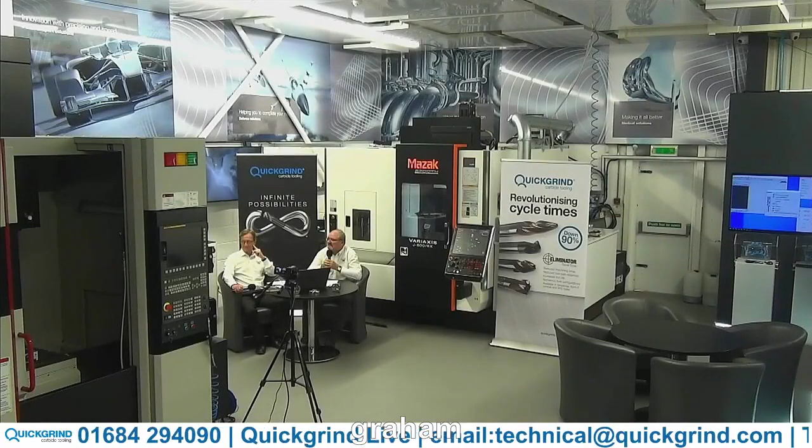Well, thank you, Ross. As Ross has said, this is the live event at the Technical Centre at Tewkesbury, part of the Quickgrind factory. We hope you enjoy the event. My name is Mike Stobart. I'm the Technical Support Manager for the UK.

After I've done my little bit about Quickgrind and where we are, I'll be handing over to my colleague Graham Hawke, who will introduce infinite possibilities, as you can see plastered behind us. It's a very important part of our company and what we can offer.

So Quickgrind has been a 50-plus year company. We specialise in producing solid carbide cutters for particular applications. Within the last 2 years or more, we've spent over £2 million investment in new machinery.

So we have the latest ANCA software, ANCA grinding machines with laser checking, to the extent that now we say in a batch of 50 to 100 tools, we're producing within 1 or 2 microns tolerance, which is, I think, will be very good. Something very important that we'd like to get over today is that seeing is believing.

We're very proud of this factory. It's grown up over the last 7-8 years. It's how it's changed, and we invite people to come and see us.

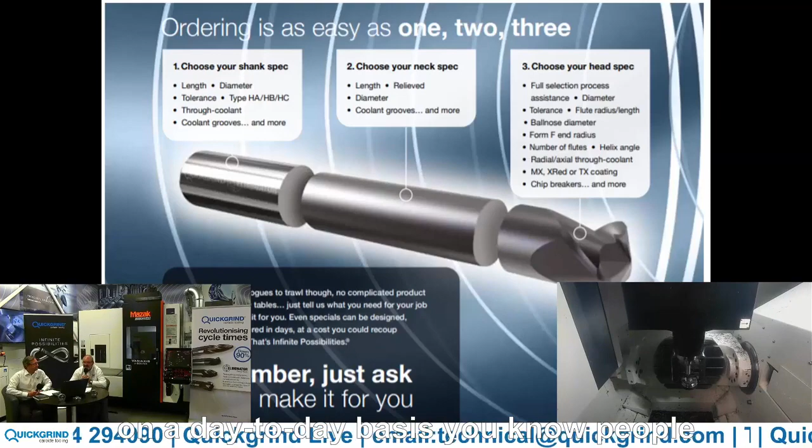All too often, on a day-to-day basis, people talk to me and they buy out of a catalogue, so they're just compromising instead of using a cutter and customising. What we like to look at is putting the right cutter for the right application with the right geometry and get it right first time.

So in effect, you could customise a whole component. The advantage of that is you optimise the component to its nth degree, and you're producing the part faster, you're producing it more accurately, and you're ending up with a better solution all round.

What we do is, again, we have a little slogan between us when we're out there on the road, and we say, why compromise when you can customise? And we like to go along with that.

We build a relationship with the customer or client, and we take it along as far as that as we can go, and that gives us the harmony with the customer, and we can also produce the right cutter, as I was saying earlier on.

But we'll talk more about infinite possibilities as we go on, because it will get laced in throughout the whole of this event. So we're now going to go over to a SolidCAM demonstration on iMachining, and you'll hear the voice of Ben Miller from SolidCAM explaining what iMachining is all about.

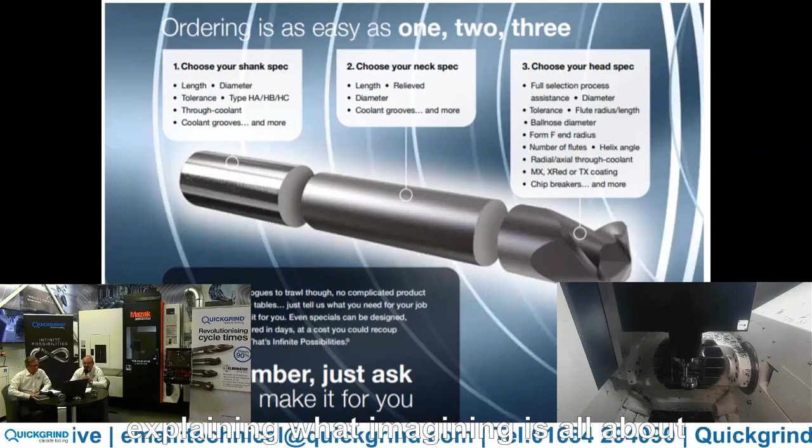So we're first going to have a look at a presentation of SolidCam. We're going to have a look at the features and benefits of SolidCam, and we're also going to have a demonstration inside the software of the part that's been programmed for today's seminar, how it's been programmed, and then we will cut back to the cameras in the machine to have a look at this being cut live.

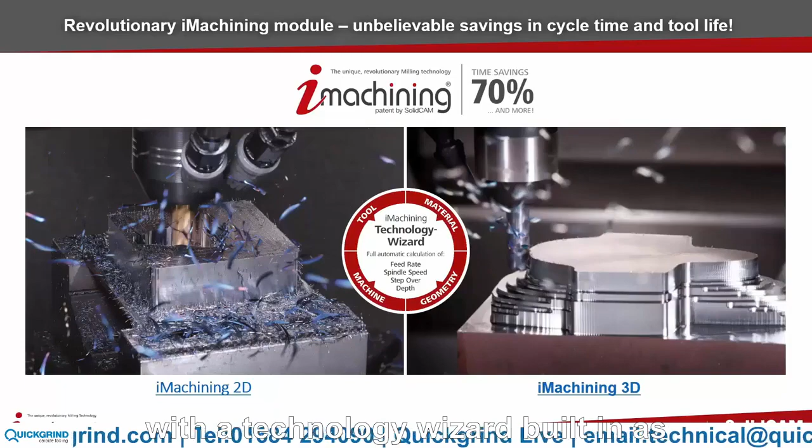Our iMachining module is our high-speed roughing operation inside SolidCam with a technology wizard built in. We get increased productivity due to shorter cycle times, up to 70% and more cycle time saving.

We dramatically increase the tool life and unmatched hard material machining. We see outstanding performance when using small tools, and we can use iMachining on 4-axis machines, 5-axis machines, and mill turn machines as well. High programming productivity and a very short learning curve.

The unique wizard will optimize the feeds and speeds for you, including the depth of cut based on the stock and the tool material, as well as the machine specifications. So this takes the headache out of programming these high-speed roughing operations.

So iMachining comes in 2 stages, all built into the same operation. The first stage is to create an intelligent toolpath, an efficient tangential toolpath which will ensure constant tool load on the machine. And then the second part of iMachining is the technology wizard.

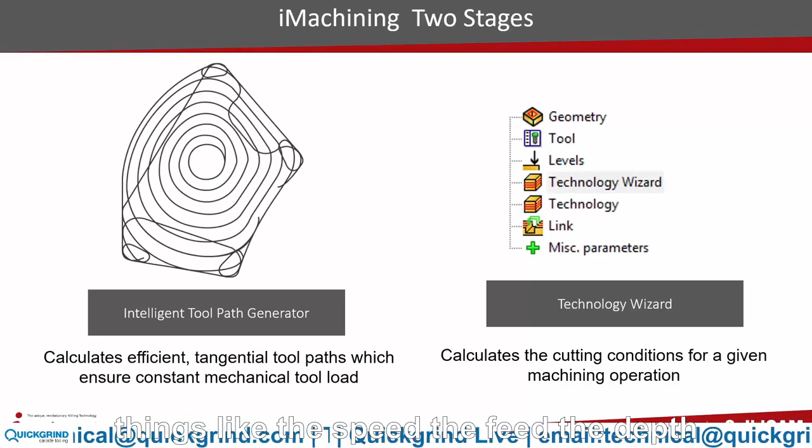This will calculate the cutting conditions for any given machining operation, things like the speed, the feed, the depth of cut, and also the cutting angles. So we can have variable cutting angles.

You can see there from 80 degrees to 10 degrees we can set the maximum and minimum cutting angles based on what we wish to achieve, or we can let the wizard handle those maximum and minimum based on the material parameters that it's been given.

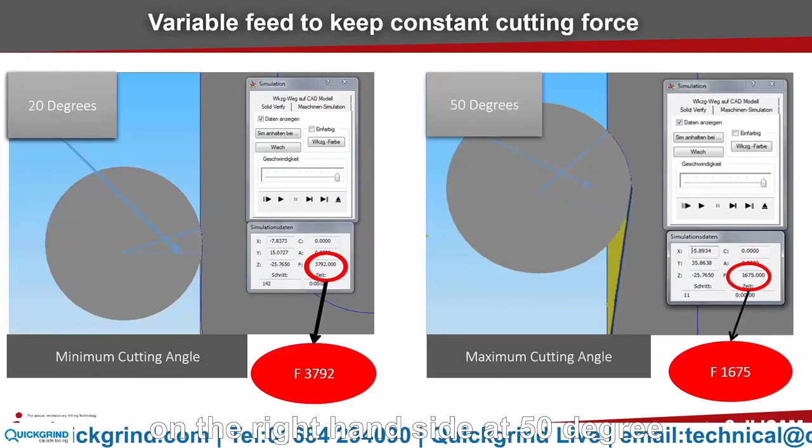You can see there on the left hand side at 20 degree engagement the feed rate is a lot higher than it is on the right hand side at 50 degree engagement. So iMachining will fluctuate the feed rate based on its engagement and its contact points as well.

iMachining is a patented technology. No other system can use our technology. You may see other systems using the spiral or morphing toolpaths, but you won't see any system using a spiral toolpath and also calculating the speeds and feeds and depths of cut using our technology.

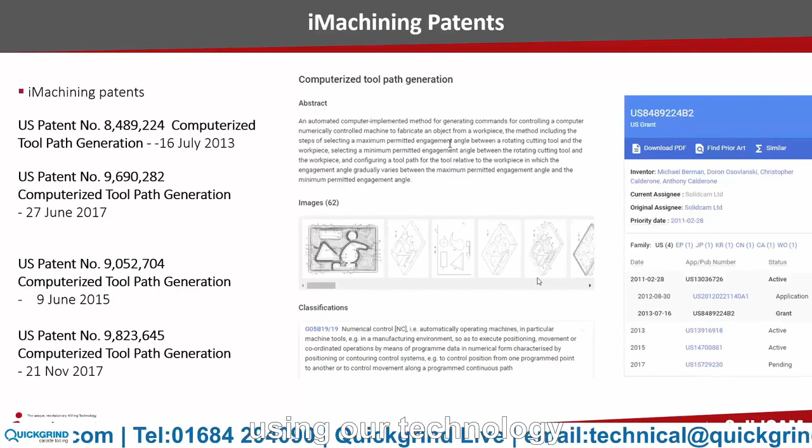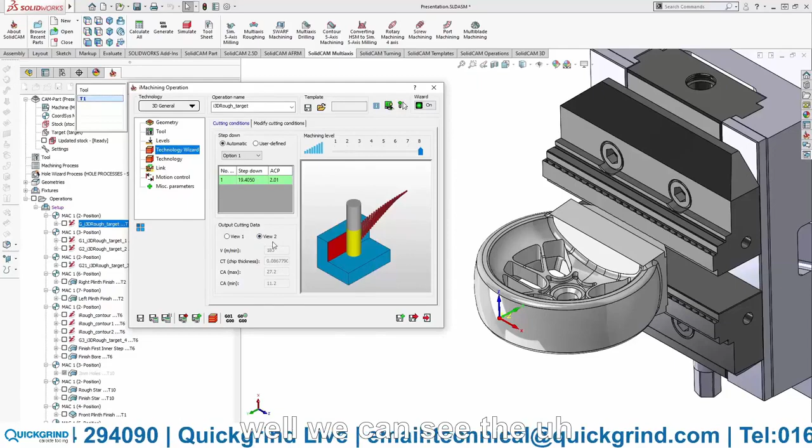Now if we see this in simulation, you can see iMachining going round there and machining all the material off. It's 3D iMachining, so it's taking into account the 3D shape and leaving that 0.1 scallop on there. And we can see this here against the actual cutting, machining out all of that pocket in the center of the component.

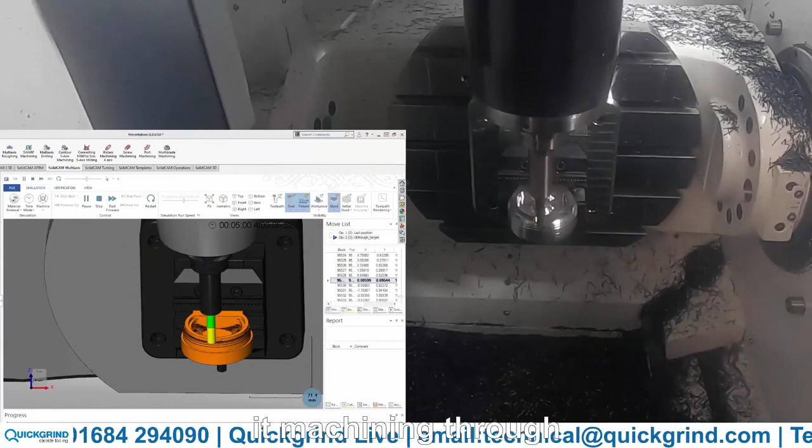Now with iMachining as well, it aims not to leave any thin walls, so we call this islands. You can see here it machining through a section of the wall, and then it will go and machine through another section of the wall to leave what we call an island in the middle, and then it will machine all the way around that island to reach the center, so that we're not leaving any thin walls and not machining up to any thin walls that could cause the cutter to break or any swarf to snag in there.

Thank you, Ben. Thank you, that's very good.

The next slide shows the tools we're using today. One important tool is the tangential barrel tool, a new development manufactured specifically for the job. We'll talk more about that when we get onto the eliminator barrel tool range - it's a finishing tool that gives incredible finishes with great step down, which we'll explain later.

We're also showing a lens tool, another finishing tool with a radius on the bottom. This one is a 12.5 radius with 3 flutes, a 10mm tool, as you can see.

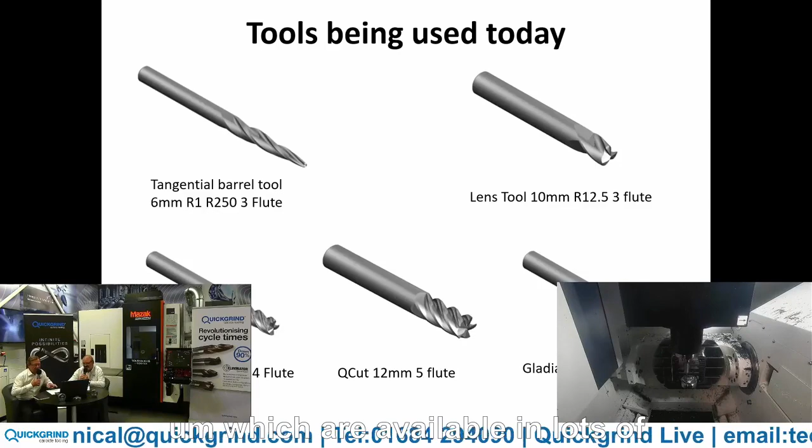For roughing out, we're using our Q-cut range, and in a minute Graham's going to talk about the Q-cuts, which are available in lots of different versions through infinite possibilities. We're also using a ball nose for certain parts - we always like to use a barrel tool or lens tool, but certain features require ball noses, and we're very good at making these. So over to you, Graham, on the Q-cuts.

Before I talk about the Q-cuts, we've got our first question from John, who says could Graham please start talking in English - we can't understand a word he's saying. That's a bit harsh, Mike, I find. That's a bit harsh.

Anyway, Q-cuts - it's a range of steel cutting cutters. We have a standard range, but if you want it longer, shorter, 4 flute, 5 flute, maybe even 6 flute, we can do that. The geometry is a variable helix cutter with variable pitch as well. It's a fantastic cutter for the majority of steels, and some customers even push it into stainless steel realms with success, more on the free machining side of things. We do very well with them, and it comes in a TiAlN coating as well.

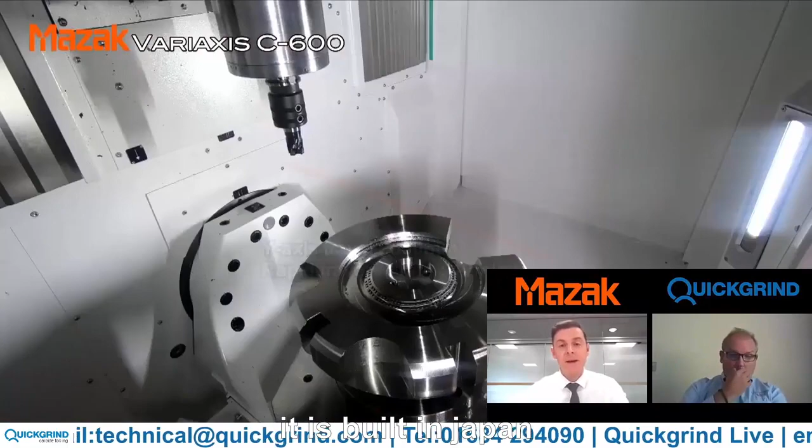That's going to be quite a commercially driven machine as well, but it's built in Japan, and that's more of an intermediate 5-axis machine, which is where the J500 ended up being. As technology moved on, it went from being entry level to being an intermediate level 5-axis machine, much more capable, fully simultaneous. So that's kind of where we've gone with that machine.

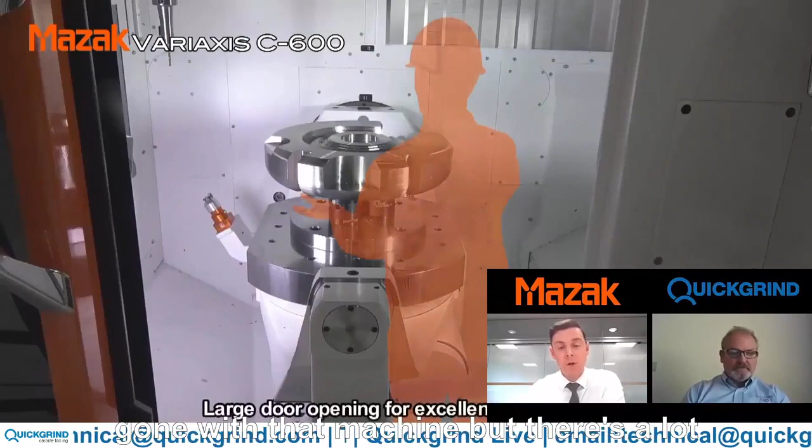But there's a lot more options on the C600, because the more options the better for us to provide the solutions that suit our customers' needs. So reading into what you're saying, Brian, the C600 will replace the J500, and the J500 will be gone completely out of your range?

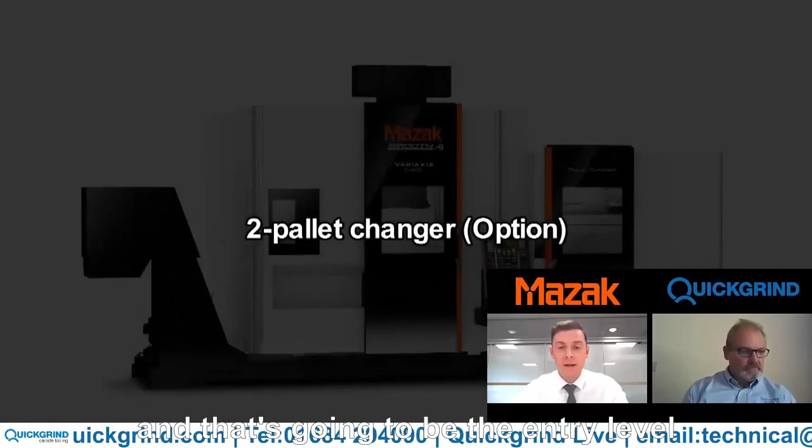That's right. So what we're going to do is we've developed the CV5 500, which is a compact vertical 5-axis machine that we're building and developing in the UK - in Worcester, designed and fully manufactured here - and that's going to be the entry-level type 5-axis that helps a lot of customers get on the ladder.

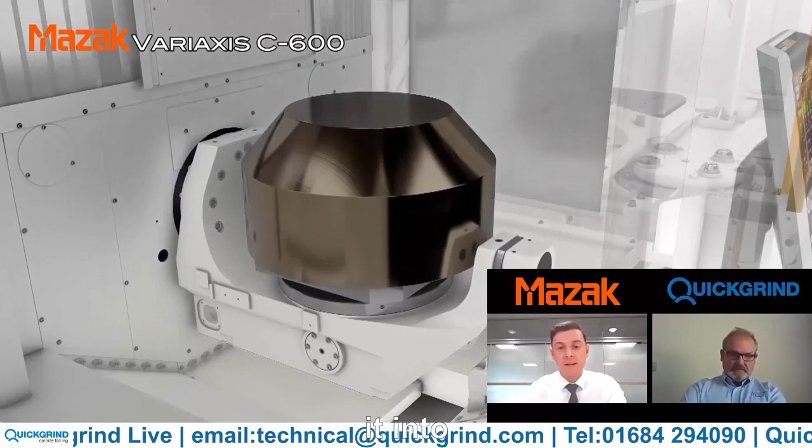To really answer the first question, the types of customers we supply to is quite varied. The J500, for instance, we supplied into small subcontractors and people replacing an old 3-axis machine for something with higher specification or a more capable solution. But we've also supplied it into well-established aerospace customers. So it's been a good all-rounder, which is where the C600 is going to be, and where the CV5 500 is going to be as well.

So there's more options with the CV5 than we have with the J500 - bigger tool magazines, we can have multi-pallet solutions, more so with the CV5 500 machine, because we've designed this in a way that it's ready for automation, as we're seeing more of a drive towards automation. Certainly in recent times, people are more open to those lines of conversation.

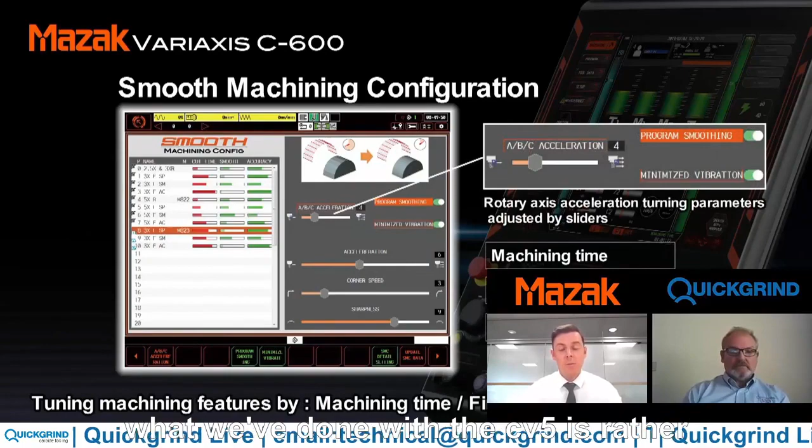And what we've done with the CV5 is, rather than have the typical Trunnion style 5-axis where you open the door and you're looking at the A-axis, we've turned that 90 degrees so it's a B-axis, which allows us to side load a multi-pallet solution right through the side of the machine, but it also allows you to use it as a normal type 5-axis if you want to use it with an operator.

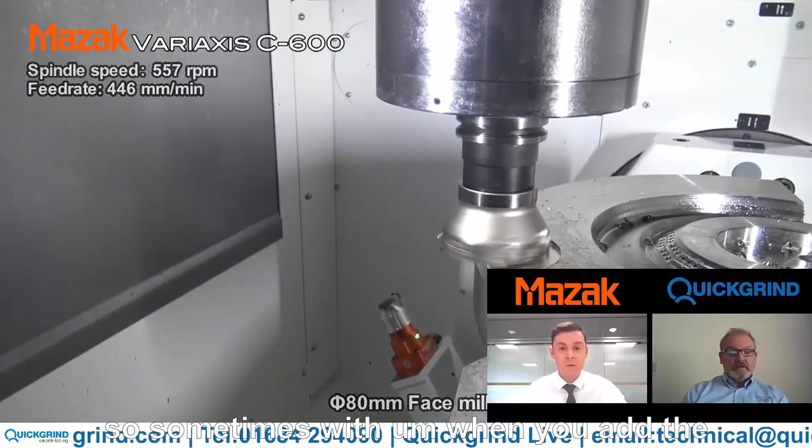So sometimes when you add automation, the robot sits in front of the machine and it becomes difficult for the operator to gain access. If it's on the side, it's just much more ergonomic.

Excellent. So the CV5 500 is now going to be a more powerful, potent entry-level machine, replacing the J500. Just to expand on it, you've got the C600, you've got the CV5 500 - do all these machines get built in the UK, or some in Japan, some in the UK, how do you split that?

Well, the J series was built in Japan, as is the I series 5-axis machine. So the C600 that supersedes the J500 is still built in Japan. But the CV5, we've designed and developed that machine in the UK, and it's fully manufactured here.

So we're not building that in any other factory. The CV5 500 5-axis machine is built here in Worcester, and it's a fully UK engineered solution.

They all come with the smooth control, the latest generation control technology, which is fully conversant with ISO but also has the conversational aspect to it as well. That has a lot of performance advantages which allow you to really optimize your machining process. You can set the machine up into high speed mode or high accuracy mode, or if you're chasing a particular surface finish, you can configure the machine so it's suitable for your application.

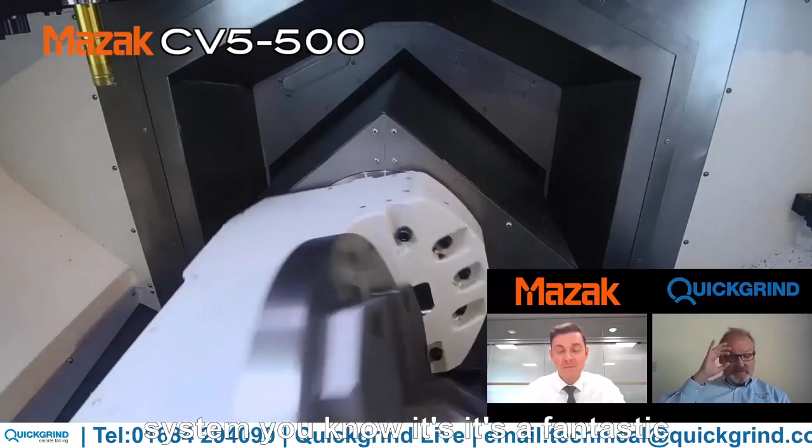We're talking about the smooth system. It's a fantastic system. We've got it on the J500 down at the tech centre. Is there any new wee cheeky parts getting added to it? What's the latest on that?

We've got some latest enhancements coming on the new line of technology. AI is the future, artificial intelligence, and we've got an AI control now which links into a lot of Industry 4 type technology. Companies are more interested now in how the machines are operating, so you've got more visibility on what the machine's doing. You can interrogate and collect that data and present it in a manageable way, which we've done for a lot of years, but Industry 4 is now the banner that all those things fall within.

We also have an AI spindle, very good technology, which allows us to automatically tune out any vibrations detected whilst cutting materials. Once you start to detect the vibration, the machine can alter the cutting parameters to tune that out very quickly. So rather than old school, where you'd listen for the right pitch from a milling cutter on metal, this automatically means you don't need to start playing with the speeds and feeds because the machine will do it for you.

We've also got further enhancements to the thermal control, basically managing variations in temperature. We've got more sensors, which allow us to keep a higher level of accuracy—that's the AI thermal temperature control. It really helps us keep up with the rest of the technology that all our partners are pushing the boundaries with, whether it's the CAM, the tooling, or the whole package. The machine needs to be capable of keeping up to date.

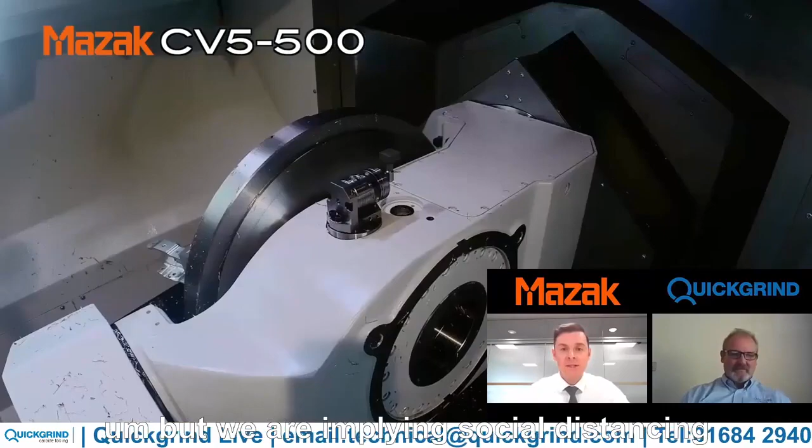Yeah, we are open, and we're having visitors in. We do the normal COVID forms, which most companies are doing, but we are applying social distancing. We are still taking customers around the shop floor. We've got a one-way system introduced, so it is very safe. I'm very confident to have customers here. We've got large meeting rooms, and we're just adapting to the new normality, really, Graham. But it's working well, so we are an open door. You can just book an appointment, and then we can show you everything that you want to see at Mazak.

Well, Brian, that was absolutely superb, and thank you for enlightening us on where Mazak are heading towards. Thank you very much for attending today and giving up your valuable time. Maybe in the not too distant future, we'll be coming to you for a super deal on the new CV5 500, and we can trade in the old J500. You reckon? I hope so. Thank you for the opportunity. Thank you very much for joining us, it's been great to see you. Hopefully I'll see you face to face at some point soon, take care. Thanks, Graham, you too.

Thank you, Brian, very good again. Yeah, thank you. We've had a question come in. Thank you very much, that's the idea of this. Throw the question in to us, make our job even harder.

About the Q-cuts, can we do 8 flutes? Yes, of course you can do an 8 flute Q-cut, but we have another range of tools which isn't showing here today, called our Demon. The Demon is specifically designed for finishing operations in all sorts of steels, particularly die steels, with tremendous results. We make them in various different lengths, so think about infinite possibilities - what are you trying to achieve? So yep, Steve, you can get 8 flutes. Contact us afterwards and tell us what you're trying to achieve, and we'll discuss it with you.

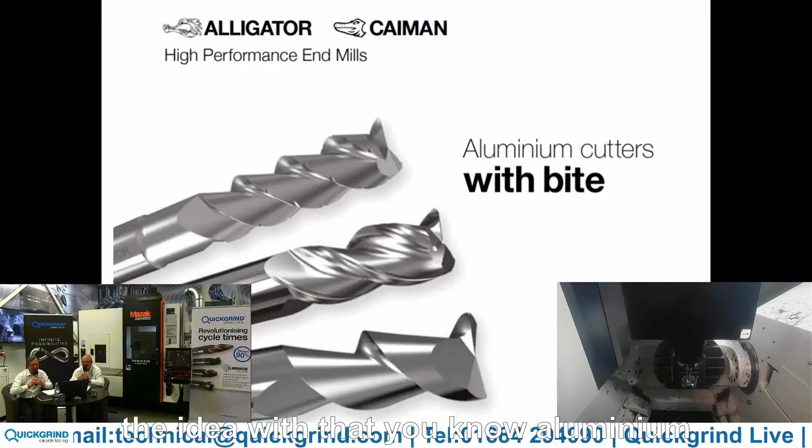Yeah, so again, as Graham was saying, 2 flute aluminium cutter, very thin primary. The idea with that - aluminium, everyone says oh just cut aluminium, yeah fine, but we want a tool that's going to last, it's not going to break. If it's out of size it can be remanufactured, that's what we want to do. Same with the 3 flute, and well, just any of our tools - we always make every tool with a view for it to be sent back to us for remanufacture. So you're not just buying a tool, you're buying a whole cycle of, I'd say, economy tooling.

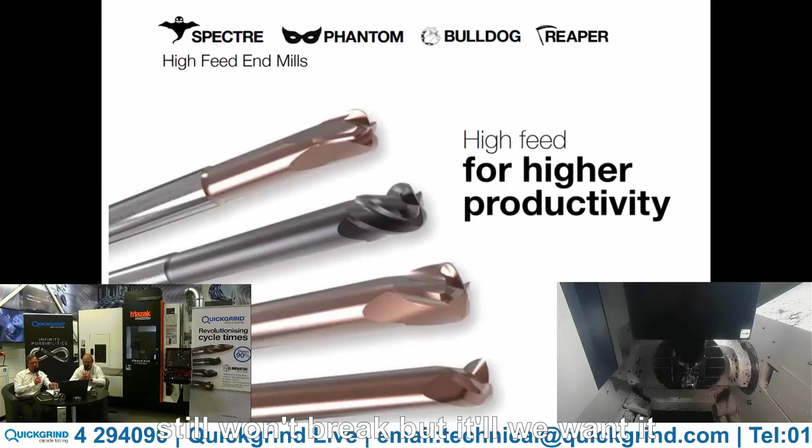Now, the recipe on the tool is designed so the tool won't break - of course, someone's going to prove me wrong now, but the tool won't break. We want it back to make sure that you get the best from the tool.

So we'll design the tool short, long, whatever you want. We've got some 2mm with 40mm necks doing very filigree work on some dies. We've got 12mm through coolant doing tremendous work in titaniums. It's the kind of tool that you can use - once you've got it in the shop, you suddenly go, oh, can I use that? And it becomes a bit of a favourite.

So high feed means higher speed, but also higher feed with shallower depth of cut, but the metal removal rate and the time savings are tremendous.

I think Graham's now going to talk about the Phantom. Yes, the Phantom is our 4 flute high feed cutter. It's got a completely different base geometry to the Spectre. It's a high feed machine, with a very small step down, very high feed rates. The applications you can throw it into are pocketing, hole drilling, especially into harder materials where drilling can be almost impossible at times, and you apply a high feed cutter with the correct strategy on it.

You're producing holes. It's one of the things we say within Quickgrind, because we've produced so many of these cutters - why is everybody still using so many drills when they can go down the road of using these high feed cutters? The Phantom cutter, which we'll talk about a bit more in depth later, you can remanufacture as well.

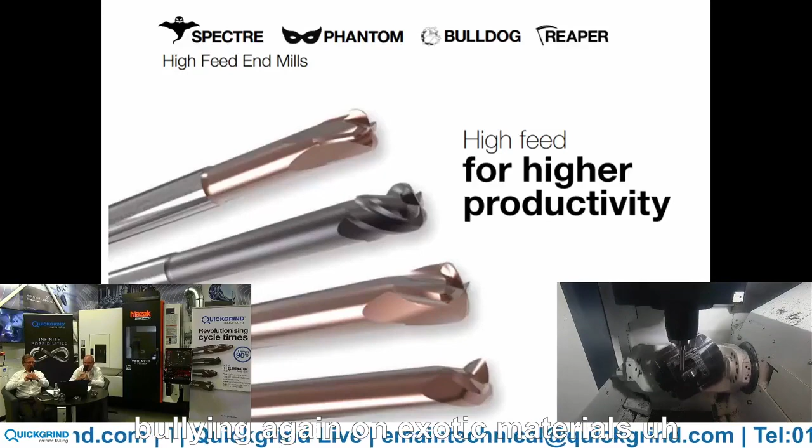Terrible, but yes, so that's the Phantom, 4 flute, brilliant again on exotic materials - fantastic results we get on titaniums as well, so many different applications. I'll pop you back over to Mike now to talk about the Bulldog and the Reaper.

Yeah, so the Bulldog is one of our flagship tools. It was developed a long time ago by the founder of the company, Eddie Howell. It's a tool used tremendously in the die industry, the aluminium extrusion die industry. Generally a 4 flute, with the shortest flute length, and the variations on lengths of tool and neck that we do are tremendous.

When I first joined the company, I tried to get together the kind of ranges that we do, and I gave up because there's just so many variations. It's incredible. These tools come back to us from all around the world for remanufacture - you're looking at 5, 6, 7, 8, maybe even 9, 10 times, depending on how you take care of the tools, change them earlier, get a decent wear on it - you get a very good remanufactured tool back.

Now, sort of going on from between the Spectre and the Phantom is where the Reaper came about - this particular 4 flute geometry between a 6 and 12 mil range for particular die steels. With our trials, we were able to outperform just about anyone on the market on that one. So there's a challenge for you.

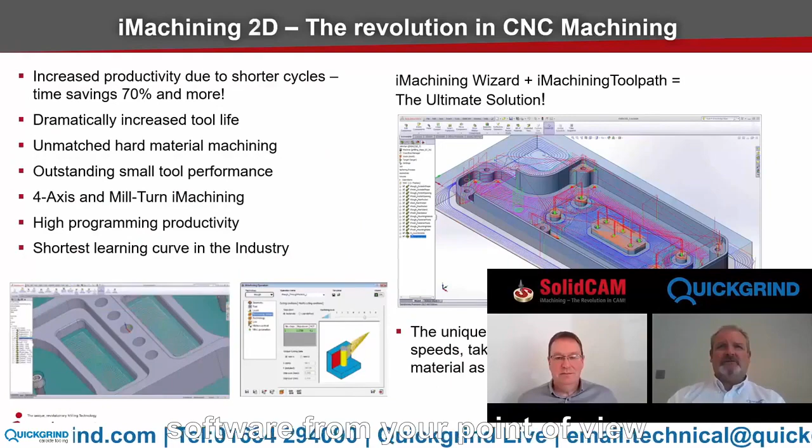Yes, SolidCAM and Quickgrind have done several events together now, but I was wondering if we could talk a little about the software from your point of view. So where do you see SolidCAM's strength in the CAM market compared to other available systems?

Well, I think we've got kind of three main areas. Whilst SolidCAM is a great CAD/CAM system across the board, I think we've got three elements that make us stand out from other systems.

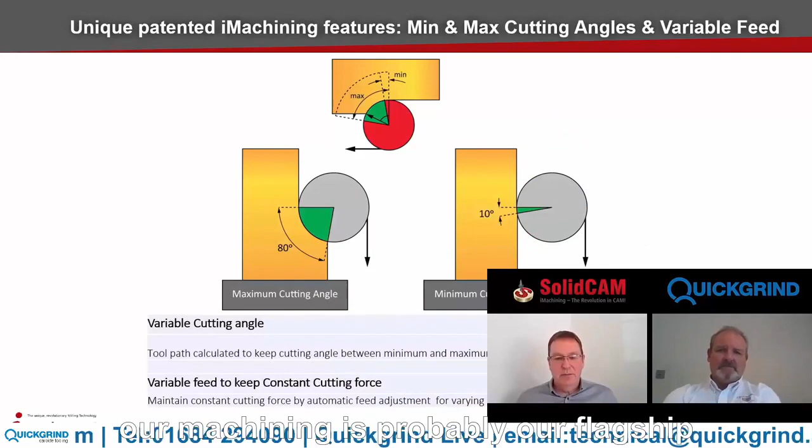iMachining is probably our flagship product. This is a system that sets itself up and adjusts the speeds and feeds relative to the tool. So you enter the tool data and the material data, and the result you get is a self-adjusting feed rate, which obviously has its benefits.

Maybe the second one is Swiss type or sliding head machines. These particular machines are very complex. They take a lot of consideration when you're doing the post-processors, because you've got possibly up to 13 axes all moving simultaneously. So you need to make sure that you're watching out for all of those.

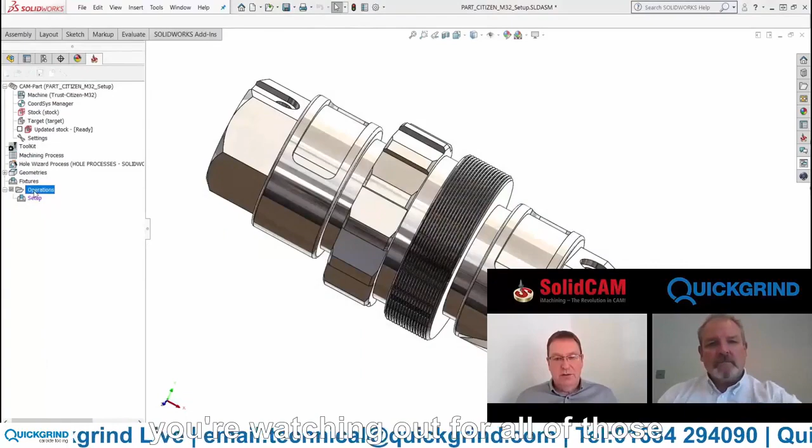And probably the third one is one that we've been working with you guys quite closely with, is barrel tooling. You know, when you come to 5-axis and using barrel tools as opposed to traditional ball noses, there's some massive savings to be had.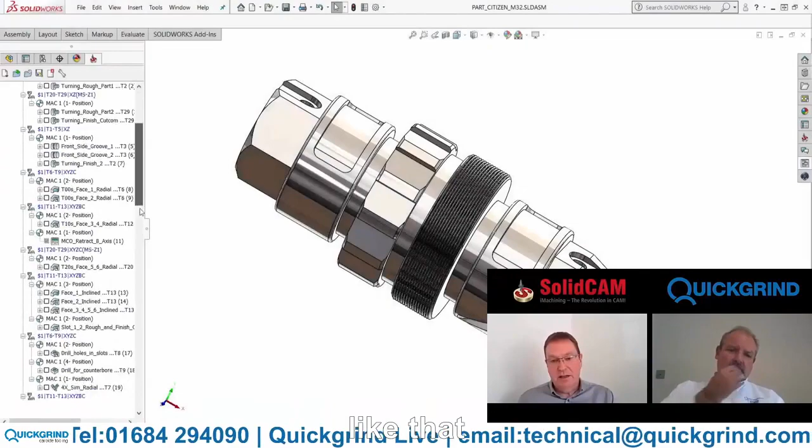You mentioned iMachining, Ian. What time saving do you see that iMachining gives you? We advertise iMachining as being able to save sort of around 70%, and that's quite a conservative estimate, to be honest. Depending on the material type, high carbon steels, we're definitely looking at 70%, but when you start getting into your stainless steels, your exotics, your Inconels, and up to titanium and stuff like that, we've seen savings of over 90%. And whilst maybe the initial cost of iMachining looks a little bit expensive, when you start looking at those time savings, you very quickly recoup your money. So it's a great product for time saving and money saving.

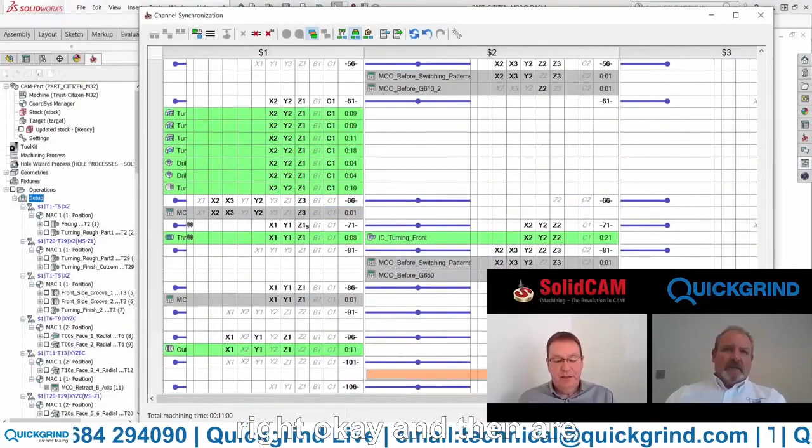Right, okay. And are similar savings comparable to when you're working with barrel tooling? Well, yeah, one of the things that we've found, especially working with Quickgrind, is being able to do a much bigger step over because of the radius form on the side of the tool. Traditional ball noses, to get a finish, you're probably looking at sort of 0.1, 0.2 maximum step downs. But when you're looking at 10 to 20 times that depth of cut and still achieving minimal cusp heights and surface finish where you need it to be, those time savings again become quite apparent. And barrel tooling isn't massively expensive, you just need the technology to be able to drive it, which is where SolidCam comes in.

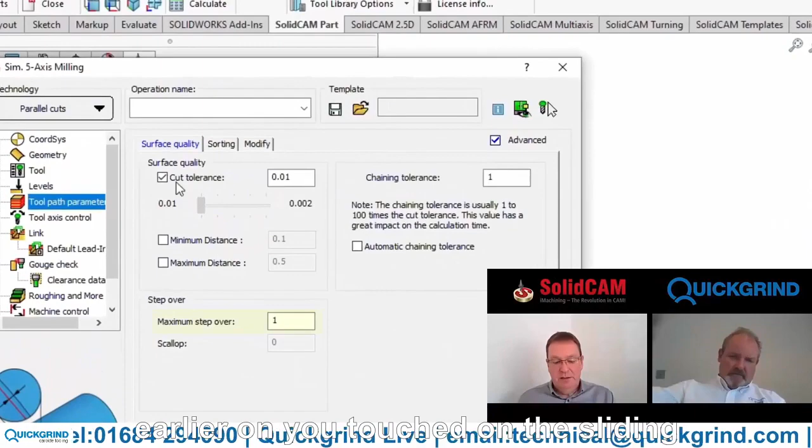Earlier on you touched on the sliding heads. How difficult is it supporting Swiss style sliding head machining? As I kind of said previously, they're notoriously difficult because of the number of axes that you've got to monitor and maintain all the time.

Absolutely. So your post-processor needs to be absolutely spot on. And then when you combine that with the simulation within the system as well, that allows us to be able to see what's going to happen.

I think one of the points we try to sell is that you can use SolidCam as a testing ground. You can try a process, make sure it's not going to collide, look at the cycle time. Then if you think maybe try this a different way, you can see whether you've made any time savings or whether it's better for the machine.

All the time you're doing this, your machine's still producing parts and still making money for you. But using SolidCam, you're able to run all these tests without any worries about it. So that's where we see the sliding head technology is going to be beneficial. It's good stuff.

It's a big strength for you, isn't it? Yeah, absolutely. Excellent, Ian. Well, you've covered some fantastic points here, and in particular the iMachining, which is a super tool. All I can say is thanks very much for joining us today, and I hope you enjoy the rest of the live webinar. Thank you.

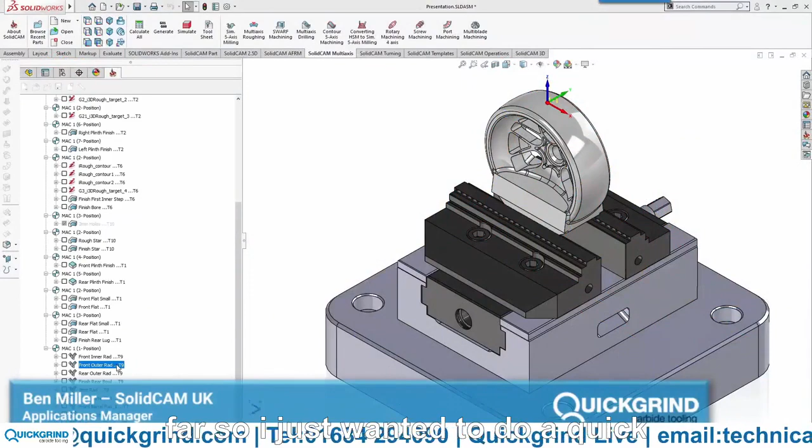I hope you're all enjoying the event so far. I just wanted to do a quick presentation on 5-axis in SolidCam and the barrel tool as well, to show you how these have been programmed.

So this toolpath here, we've selected the radius face and the two edges to blend between. The tool is a 6mm ball nose, and we're doing a 0.2mm step over. These are the only selections I've made, and we can see we get a nice sweeping toolpath, cutting in the top left hand side as well.

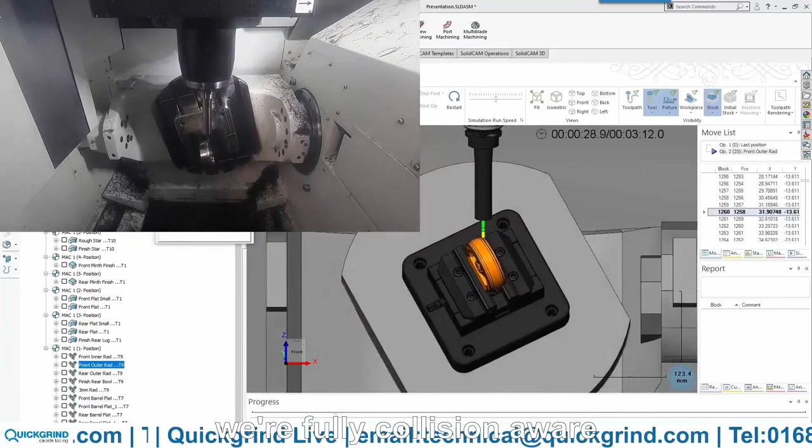You can see that we are fully collision aware. The ball nose stops before it hits any of the vice or fixturing.

Now the next toolpath is the barrel cutter. Here we select parallel cuts, select the face we want to machine, and we want to wrap that around the y-axis. The tool is the barrel cutter we're using today. This is a 250mm radius on the cutter, and the clearance plane is in the y direction.

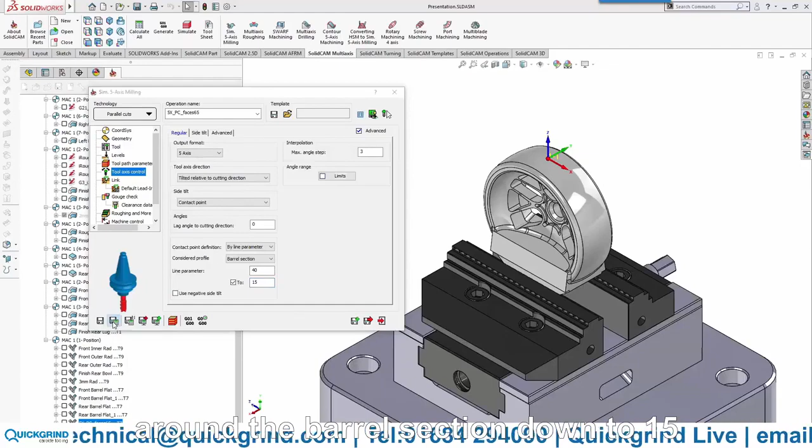Now I'm going to put the sort into one way and climb, and on the tool axis control, instead of using angle, we're going to use the contact point of the barrel section. Now I'm going to set this to between 40 and 15%. That means we're going to contact with the cutter between 40% around the barrel section down to 15% around the barrel section. I'm going to show you what I mean in the basic simulation first.

We can see here, if I just start the simulation and play that along, that first cut, the contact point is 40% up along that barrel section. If I speed that up, as we go down the toolpath, the barrel tool will start to rock over, and if we pause there and get it to the top, you can see we're a lot further down the barrel section on the contact point now.

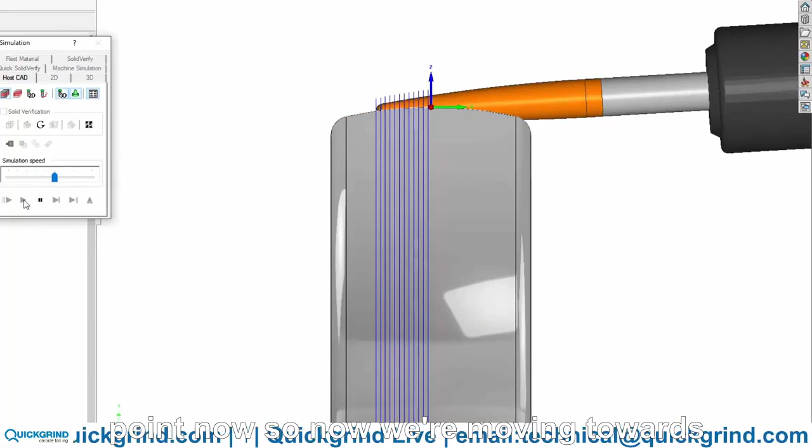So now we're moving towards that 15%. This is to stop us using the cutter in the same point all the time. We're varying the contact point, and we can vary that anywhere between 0 and 100%. You can see now we're getting a lot closer to the 15% mark as we get to the bottom of that toolpath. We can see in simulation the nice sweeping toolpath that we get as we contact around that outside shape.

You can see that in the top left hand corner as well, actually cutting. So we'll hand back over now to Mike and Graham, and we'll see this actually cutting live on the machine, and you'll be able to see that barrel cutter create a nice finish along that face.

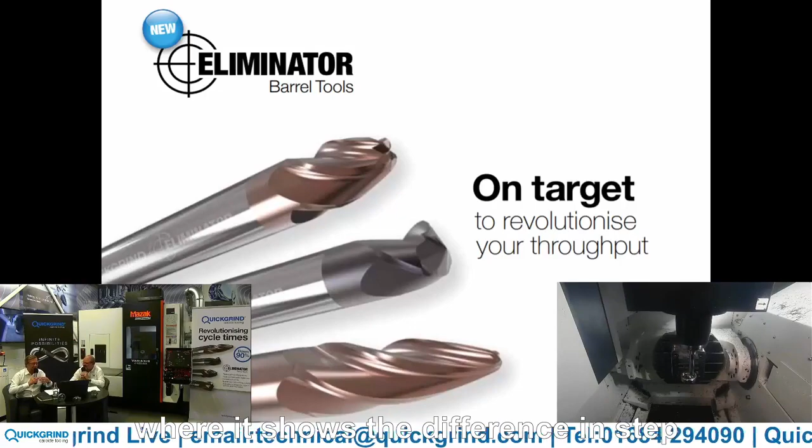We'll go into it a little bit more detail. You'll see in the next screen where it shows the difference in step down from a barrel tool to a bull nose. So let's assume you've got a 10mm bull nose, 0.2 step down - you're getting a nice finish, but the cycle time is huge. You'd like to get a better cycle time with an increased step down, but you can't - you're limited on the dynamics of the tool.

So if you look on the screen, hopefully it's showing now, but you'll see that the barrel tool is based on basically a huge bull nose. So we use the radius of that tool to give us the step down increase. So whether it's 1 mil, 2 mil, 3 mil, 5, 6, it depends on what you're trying to achieve. There's different versions of barrel tools, which Graham will go into, but I think the most important thing to say to you is that we develop the tools around the job.

You're going to get fed up with this, so it's called infinite possibilities. Actually, you won't get fed up with it, because when you actually start buying into the process, you'll suddenly realise that there's huge savings to be made - cycle time savings. Now, one thing as well, as we love to always say, every tool we make is with a view to be remanufactured.

Recently, there was a batch of 200 barrel tools that went out to one of our customers in America, and they send them back on a regular basis for remanufacture. So we haven't actually got to the end of how many times that can be remanufactured, because they're working so well, and they're running in some difficult materials, in titanium as well.

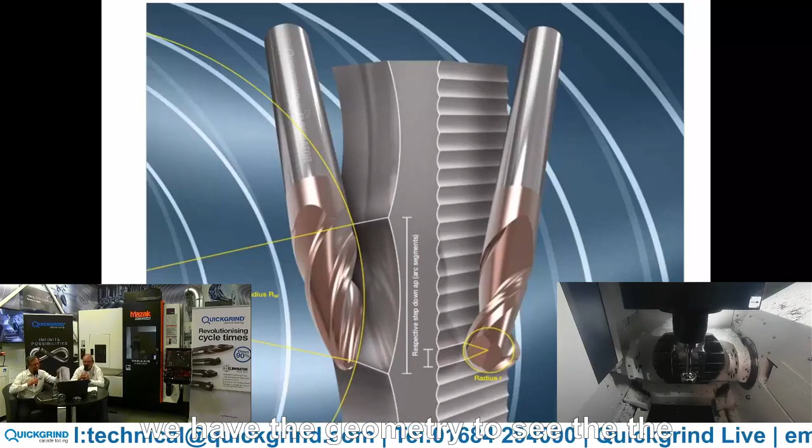Yes, barrel tools - once again, Mike's probably gone over it already. We will manufacture a barrel cutter for any material, and again, like I was saying earlier, we have the geometry to suit the application and suit the right material.

You'll hear people talking about conical barrel cutters, tangential barrel cutters, and even conventional barrel cutters, because barrel cutters have been around for a long time. There's just not been the software to drive them, and in this day and age we have SolidCam proving that the software is there now.

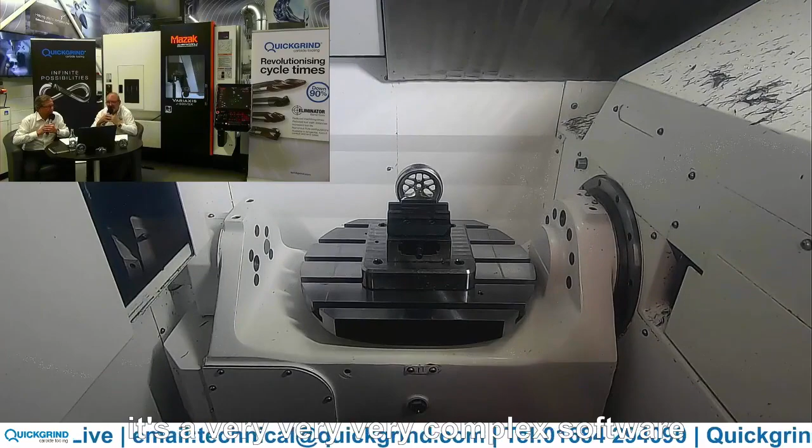It's a very complex software. It's going in now, actually, as I speak. What superb timing - just shows it's live, and we're not just gimmicking it here, but the barrel cutter's coming in now. It's going to start whizzing about.

Like I say, we do conical and tangential barrel cutters. Basically what I'm trying to say is, Quickgrind, if you've got an idea in your head, or whatever geometry a barrel cutter is using, we can make any of them. We make them from our own software. There's a standard range out there.

There's so many people you'll see on social media at the moment who are chucking out barrel cutters, and they say, what's different about our barrel cutters? Well, the difference quite simply is, going back to infinite possibilities, we'll make any radius a barrel that you require. It is going to be a situation as we move forward with barrel cutting technology that is going to be almost bespoke to the part that you're producing, which will determine and drive the radius that you're going to apply to your application. And we've produced, I think, as small as 35 rads.

We've gone up to, believe it or not, 10,000, which is almost impossible to calculate, but we did, and it worked. Which is almost a straight line, but there is a radius on it.

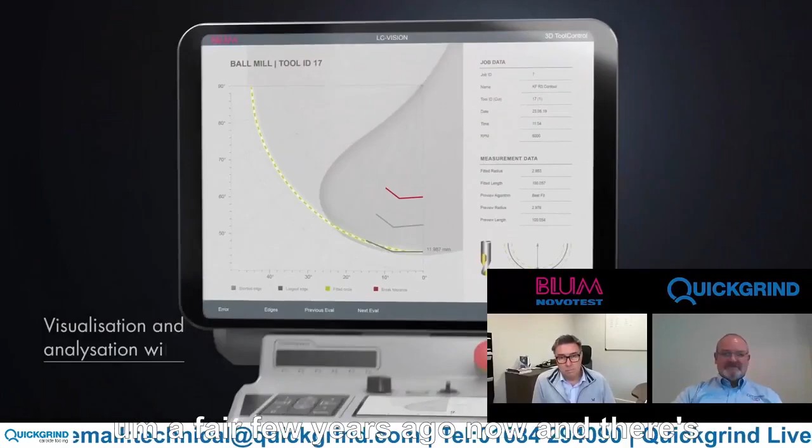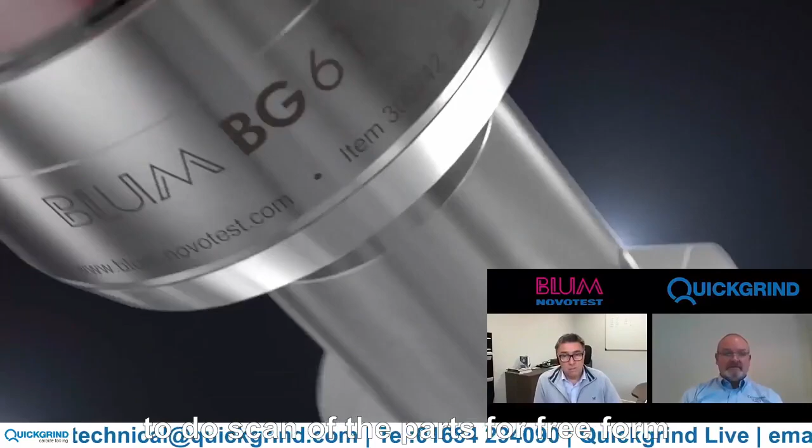Thank you, yeah, certainly, a pleasure to. We're actually installing it as we speak, so hot off the press on this one, with our very latest technology. I think people who know Blum know that we came out with the Digilog family of products a fair few years ago now, and there's been new adaptations to that product as time has gone on. To briefly explain, the Digilog is taking conventional probing, so touch probing for part inspection, part setup, but it also brings an analog aspect to it, so we can start to do scanning of the part for free-form components, 5-axis components, and we can actually do full measurement on the machine.

Right. But the system that we're currently installing now on your Mazak in your showroom is the latest generation of the Digilog products, called the roughness gauge, the TC64RG. It's a spindle probe designed for surface measurement, so measuring the surface integrity and quality inside the machine tool while the component is still clamped.

So what people will see there on the Mazak is that there's a spindle probe. It looks like a conventional spindle probe held in the machine tool spindle and loaded in through the tool change. But when we drag across the surface, we're actually measuring the surface quality of the component. Then with the external software, the Blum RG version 3 software, it does an analysis and gives you the results of the surface finish in all the conventional measurement protocols, so RA, RZ, RT, RMAX, RMIN.

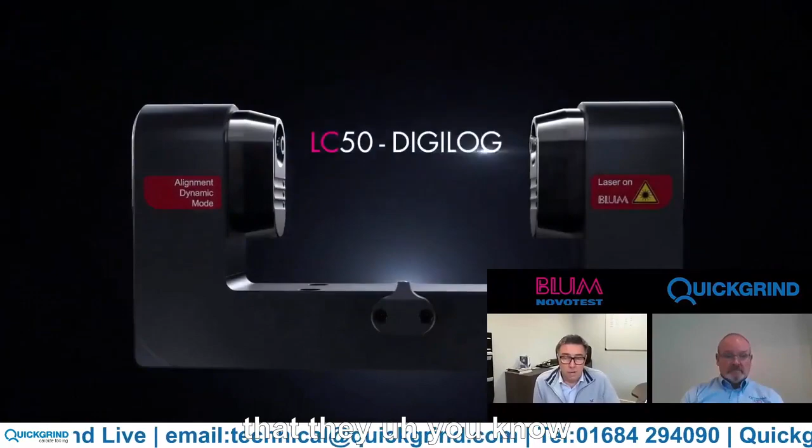You'll get all those results displayed across the screen, which people will be able to see. So a customer can instantly get the result in the format that they prefer, that they would normally measure their parts with. So yeah, it's the very latest technology from Blum.

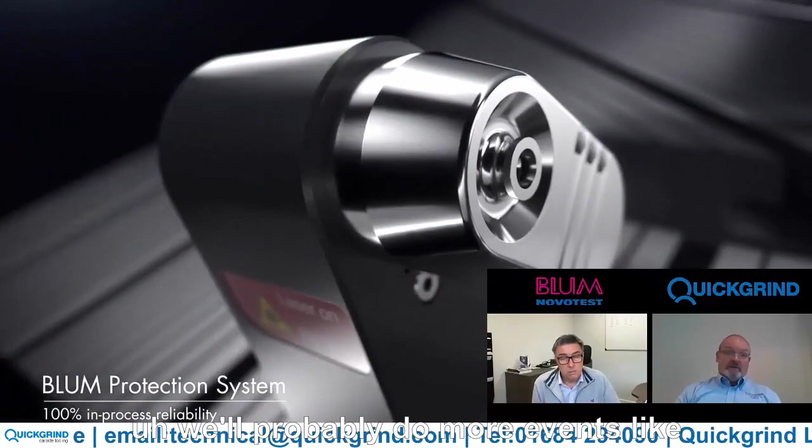Yeah, that's excellent, and thank you for explaining that. We're very grateful that it's getting installed onto the machine. It's another advancement for us, something we can talk about. I'm sure in the future we'll probably do more events like this, involving yourself, going more in depth into how it's being used.

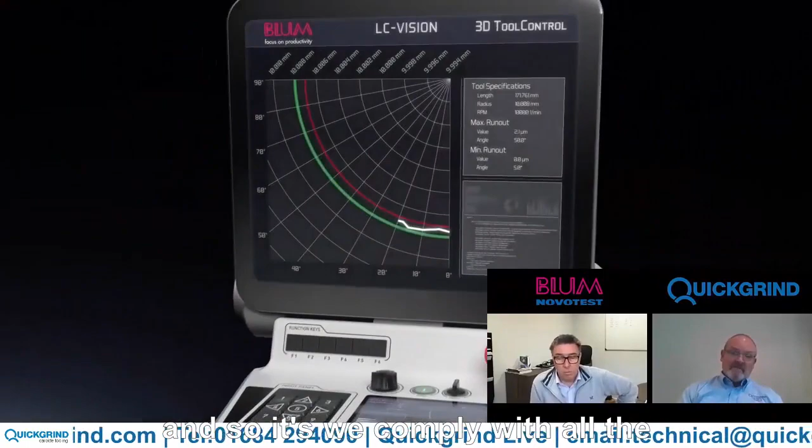From Blum yourselves, the door's open. You're back in action after everything that's been happening over the last few months in the mayhem. Are people okay to come in and see you and get a look around the facility in the showroom? Absolutely, yeah, I mean these crazy times we live in, but yeah, we didn't stop, we stayed open, although a lot of the time was a lot restricted and not many people wanted to travel about really. But yeah, we've set up the facility that we have here in Burton, and so we comply with all the government guidelines and laws of the way we have to work these days. And we're open, our guys are active. We can come and visit customers, talk about projects, or customers are more than happy to come here and see what we're about, what we can do.

Obviously, facilities like you guys have got there, that excellent facility that you've got there is perfect for us to be able to show products, live demonstrations, and customers can really get their hands on and really feel what it's like. So yeah, fully operational and ready to talk to anyone that wants to talk to us. Brilliant.

What you said there about our facility being open and able to use it - hopefully in the future we'll have a lot more engagement and you can boost your product and get more profile. We're always open for any type of event like this, and you've been a fantastic impact to us.

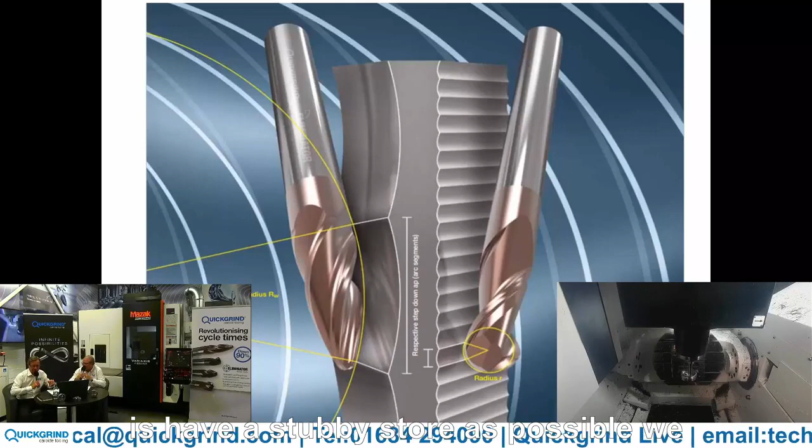We're going to talk about lens tools in a second as well. You can look at the mold and die industry - mold tools and deep pockets where the barrel tool will come in. What we like to do is have as stubby a tool as possible. We change the tapers, the flute radiuses, and ball noses to suit the application. You can have 2 flute - we've done 2 flute, we've done 8 flute. At the moment, the sky's the limit still; I don't think we've even touched the limits of what we can do.

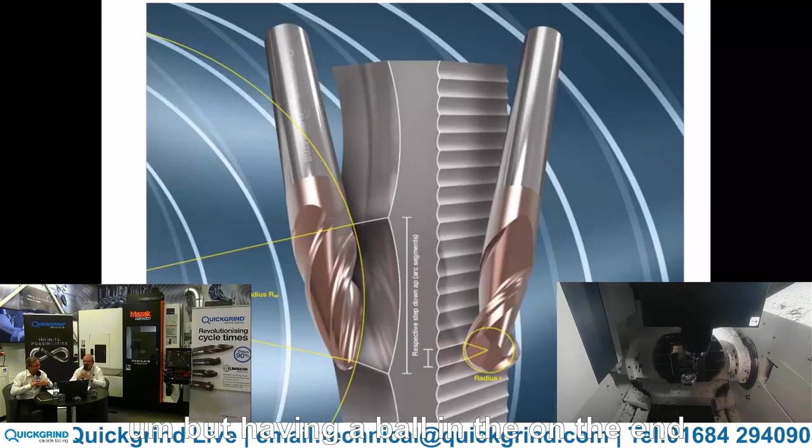Just to quickly come in - it's also a multi-purpose tool. The way it is, having a ball on the end of it as well, you can get into a pocket and do all the barrel work and fill up the walls as well. So it's such a versatile and fantastic tool to use.

But now I think we're going to go and talk about the lens tool - you mentioned earlier, but yes, I was a bit too quick mentioning them earlier, I was going ahead of the slides, so apologize for that. I'm not a professional, so back over to you, Mike. You told me you were. Oh God.

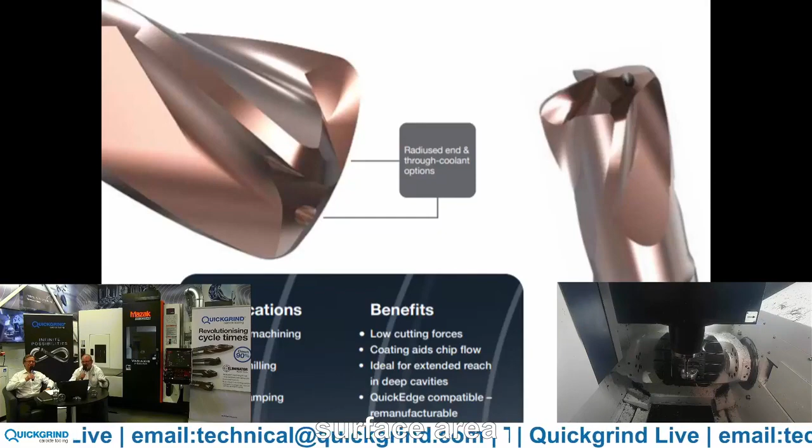So as we were saying earlier on, lens tools - we can go on again about the different rads, and you can have whatever rad you fancy. They're a very, very good tool for surface area. If you can imagine scanning with a ball nose, 0.2 over a surface, and then applying the lens tool with the size of rad it's got on it - it could be 12, 18, 20, 25. Some are bigger, but we tend to work within that range.

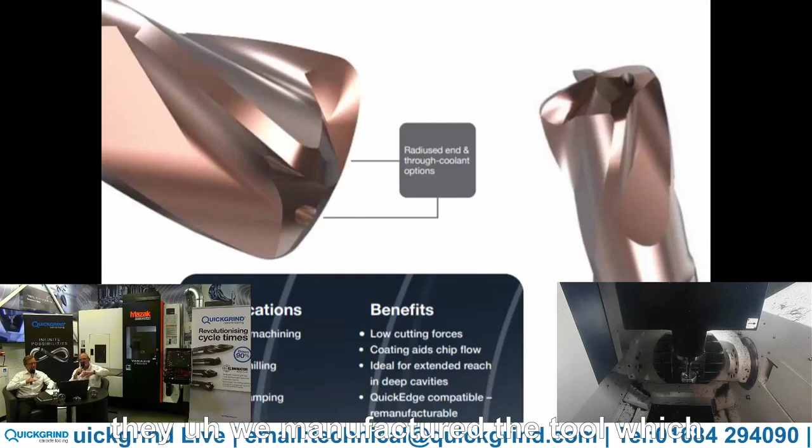There's a lens tool being used on this part as we speak. There's another component sitting over the front that SolidCAM used with a lens tool, and with the part sitting in front of it, we manufactured the tool, which was an idea of Ben Miller - can we use it as an end mill as well.

So we went up the flute, put the radius on it, went up the leg of the brake hub, formed the radius, and then finished off all around the part. So it was actually a one-in-three tool.

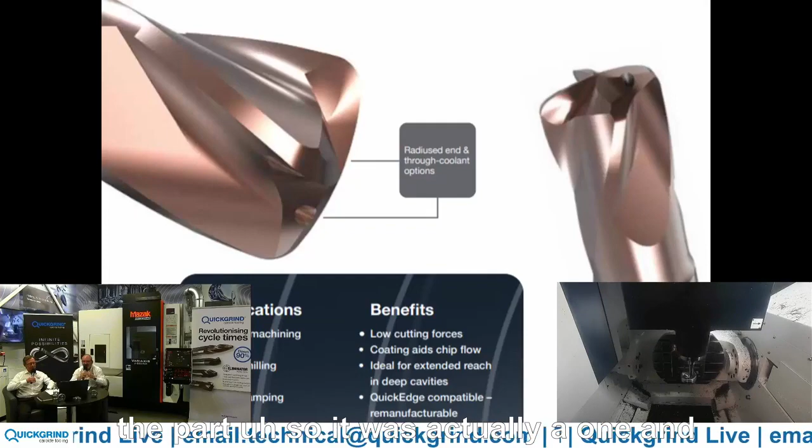Thank you for the input on that one, Ben. We've applied that in different processes with different customers and different applications. So once again, the versatility of the lens tool is fantastic. Time saving is huge, and in the game out there, especially in manufacturing plants throughout the country and the world, every second counts and every second's a penny. So we stress massively to customers how good this cutting tool is, and how good the barrel tool and the lens tooling process is to our business and also to your business.

Anything else to add, Mike? Well, probably to add to that, we see this as such an important tool for us that we have a website dedicated to it: barreltools.com. It's live, it's now, you can go and have a look. You can download the brochure, the Eliminator brochure, and then if you open it up and go, I don't know what the range is - let's go back to what we always say: infinite possibilities, especially with barrel tools of all the different versions.

We'll design it for your job. Because it's feature specific, you do need to talk to us - it's a lot better to talk to us. Just give us a bit of time. If you say, I've got a job running tomorrow and I want to run a barrel tool, that's probably not the way we do it, and not the best way to do it. But if you say, I've got a job running in three days' time and I need a barrel tool for it, chances are we could do it for you. The important thing is to get the right strategy. We'll design a tool, you tell us what you want to do, and the job's a good one. Everyone's a winner in that respect.

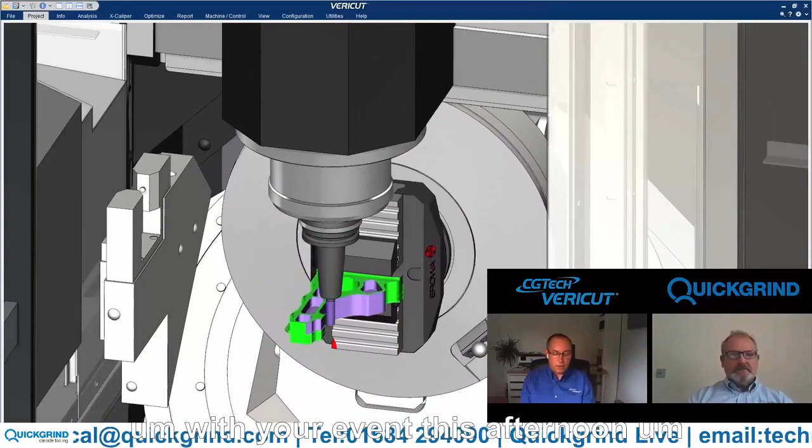Thank you for giving up the time to come and join us this afternoon. Your support's absolutely fantastic - as a partnership, you've supported us very well over the last few years. But I was wondering if you could elaborate a bit more on what your software actually does. Tell us a bit more about VeriCut in general. Yeah, so thanks, Graham. Firstly, I'd like to speak a bit about how we've actually supported you with your event this afternoon. Obviously, SolidCam - you're working in conjunction with SolidCam and ourselves.

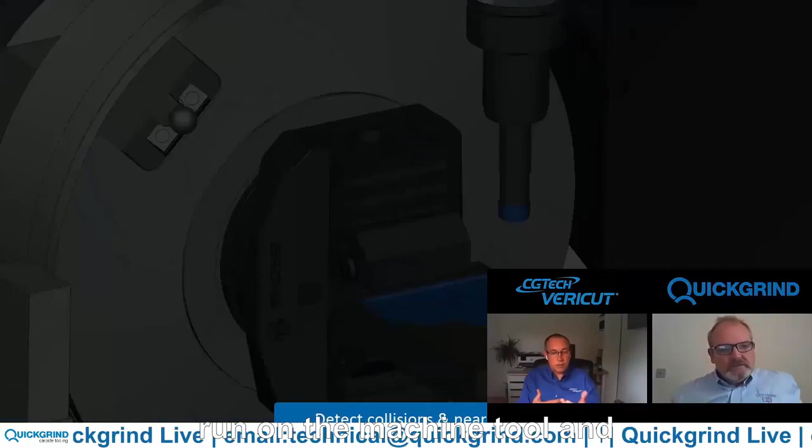SolidCam are based in the north of England, and your tech centre is based in the south of England. SolidCam are doing the programming for the component, but I don't know how much of a proven post-processor they've got for your Mazak. So what it's really allowed SolidCam to do is run the G-code through VeriCut as it would run on a machine tool, and that's what VeriCut's all about.

VeriCut will run the same G-code through the simulation as it would run on your machine tool. This allows SolidCam, specifically for your event, to prove out their process offline before they come on site. So when they came on site to prove out the program, they already knew the G-code was good and safe, with minimal time needed, because the benefit of VeriCut is you can take all that prove-out offline and do it through the software. So in a nutshell, Graham, VeriCut is independently proving out the same G-code that your Mazak machine tool runs, and that's what SolidCam have done for your event today.

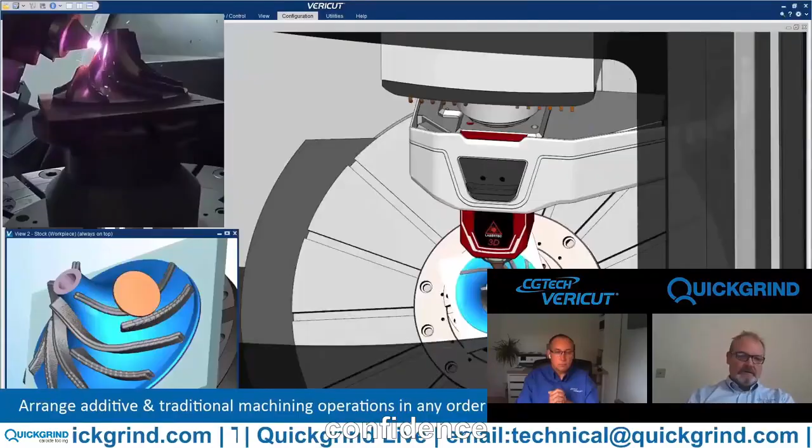Taking out of that what you've just said, Scott, it gives your customer base a lot of confidence in using the VeriCut product when they can go to the machine knowing they're not going to have any collision. Am I right in saying that? Yeah, that's the whole objective of the software - safe program, right first time every time, and to minimise downtime in terms of prove-out at the machine tool. In most cases, there'll be no prove-out whatsoever - they know the program's good before they actually take it to the machine tool to run.

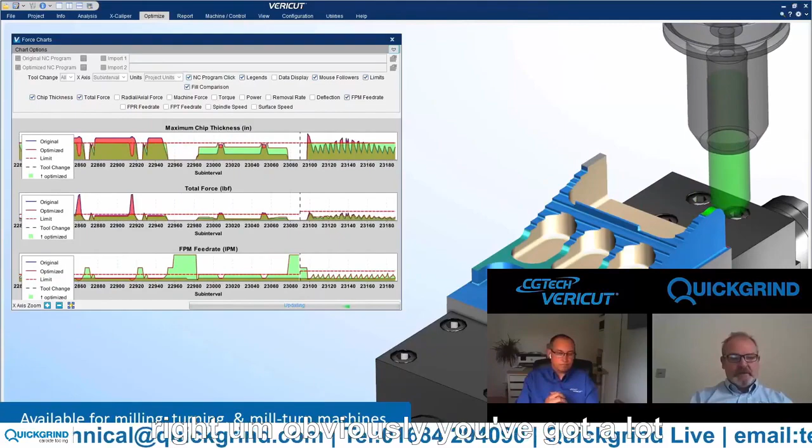Obviously you've got a lot involved in your software - it's a very powerful system. From my point of view, I've been involved in and attended some Force events, which I found very enlightening. I know it's a bit of a buzz for yourself, you're always improving it - every time I've been to one, something else has been added on, and it's always very interesting. Could you maybe tell us a bit more about the Force product?

Yeah, sure. So we launched Force to the UK market probably getting on towards 4 to 5 years ago now, Graham. It was a bit of a slog at first - with any new technology, customers and prospects are a bit sceptical. So we did a lot of hard work in the early days, and to some degree are still doing hard work proving the technology, but we're getting there, and we're seeing more and more customers adopt the Force module.

Essentially what Force is going to do for you is look at an existing process, really importantly against the characteristics of the material you're actually machining - so it's physics-based software. It will map the process out for you in graph form, so you're getting a calculation of chip thickness on the tool, and a calculation of force. What we want to do is look at that chip thickness and vary motion in the NC program to flatten it out, getting a nice balanced NC program to maximize the cutting conditions safely.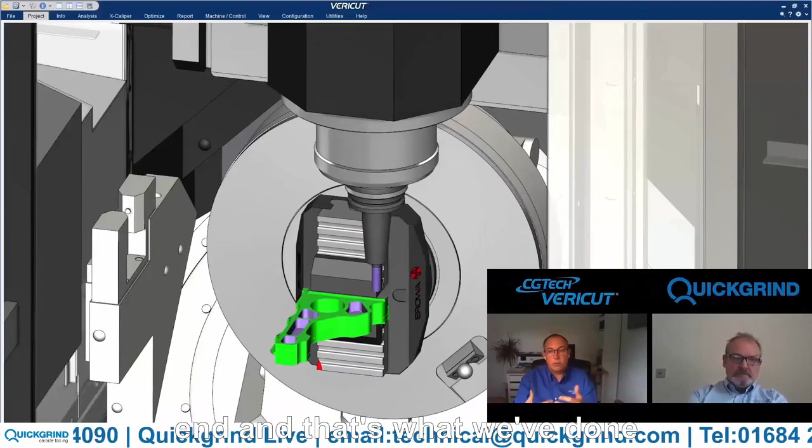As I said, we launched the product to the UK 4 years ago - it's a relatively new piece of software, becoming maturer and maturer, with more gone into it, mostly for ease of use. Specifically for Vericut 9.1, we've introduced what we call Force Learn mode. Prior to 9.1, the user would have had to click on the graph, get a reading, to populate that limit at that particular point. Now Force can actually learn from those results and populate all the limits into the software with very little user interaction - one or two mouse clicks - and you get an optimized process at the end. That's what we've worked very hard on over the last year or so developing, to bring that benefit to the software.

From my point of view, it not only improves cycle time but also tool life, and it's a benefit to the machine tool life as well - as a rounded package it's absolutely fantastic. So you're not going to just get a reduced cycle time. If we think about what damages carbide, it's shocks on the carbide, spikes in the process - and that's what you're going to identify with Force: have you got any bad motion in your NC program which is going to damage the carbide?

So it's not all about cycle time, it's about a more cost-efficient process in terms of reducing your consumable spend as well. Really interesting, Scott.

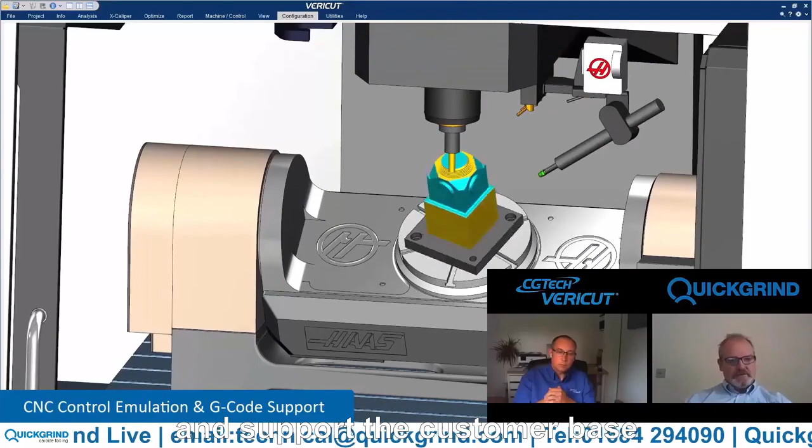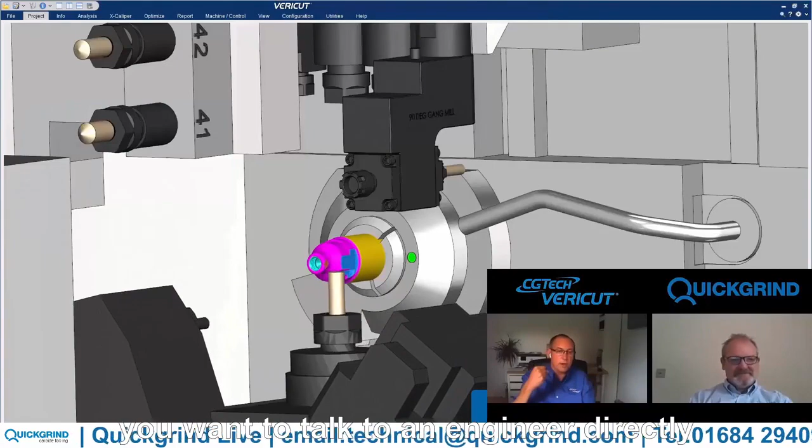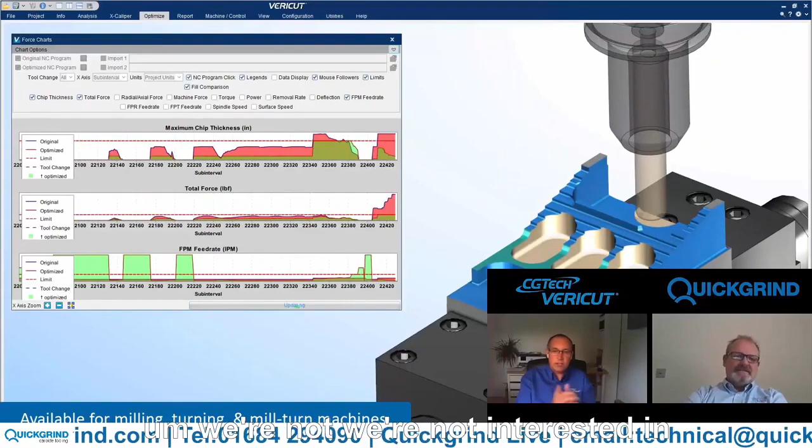Thanks very much. You did touch on it previously about your customer base. How does Vericut go out there in the field and support the customer base? Really important question, Graham, and something we're very proud of - the level of service and support we provide to our customer base. I've worked in the software industry quite a long time, and customers are sometimes used to a slower response. But sometimes you may pick up the phone and want to talk to an engineer directly at that moment - CG Tech can offer that service. If I dial the support line now and want to talk to an engineer right now, I can do that, and I can ask that engineer to remote into my system there and then to look at that particular problem. So it's about giving the customer a high level of service. We're not interested in putting them into a ticketing system or a queue for an engineer to call back - that's not good service, that's not what an end user wants. Also speed of turnaround matters - when a customer buys a new machine and it's delivered, they want that Vericut machine configuration delivered pretty quickly, and we can offer that service as well. So we do pride ourselves on the service we offer our end users.

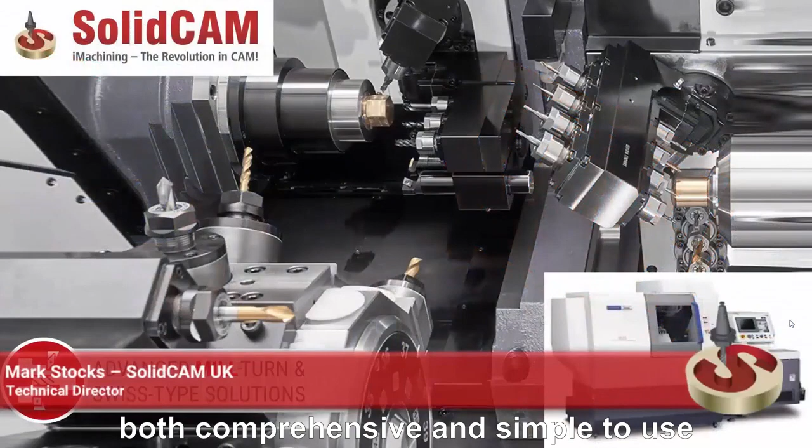SolidCam support for Swiss Turn is both comprehensive and simple to use. In this overview we will be demonstrating this on a Citizen M32 machine. This machine is a 3-channel machine with 5-axis capabilities, multiple machining patterns, and superimposition. All of these features are fully supported in SolidCam with full machine simulation.

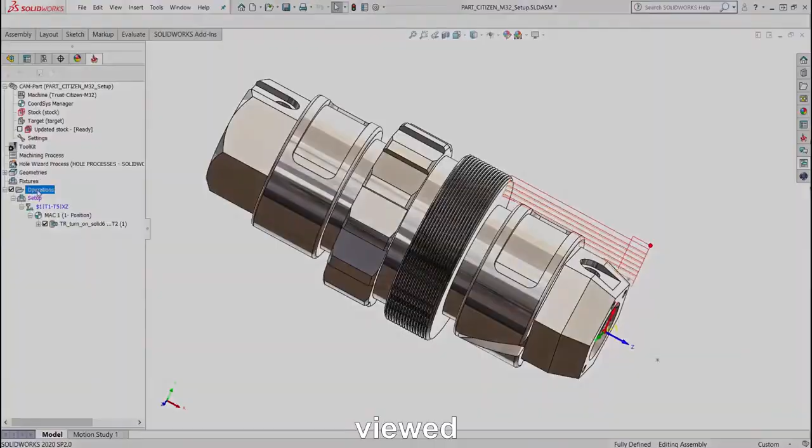SolidCam supports all tool holder types, including multi-station tool holders for both milling and turning tools. Tools can be moved to different stations and dynamically viewed to make sure the tools are set to the optimum position. Programming of operations is exactly the same as it would be for any mill-turn machine in SolidCam. Here we are selecting the area to turn directly from the model and the tool from the library. The tool path is then calculated with full support of cycles on the machine. As with all operations, this can be viewed and simulated as the machine will cut it.

Even adding more complex machining strategies such as cylindrical milling is kept simple. Select the area to machine direct from the model, the tool, and SolidCam does the rest.

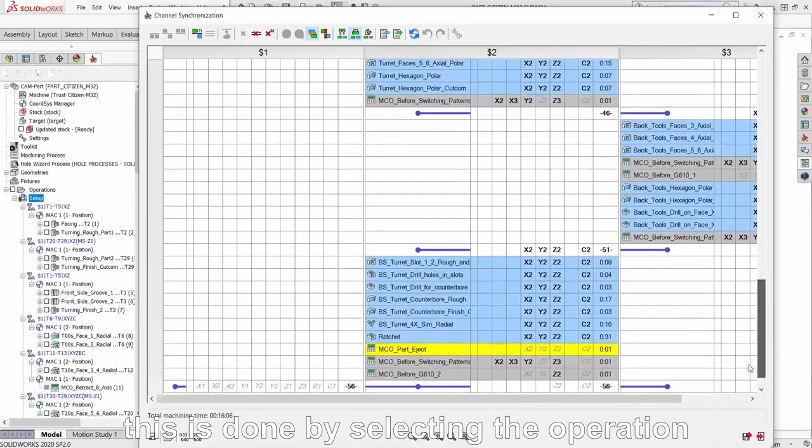Once the programming is complete, the channels can be optimized to get the best cycle time on the machine. Currently the part is programmed as a single part, but in reality we want to be working simultaneously on both spindles. This is done by selecting the operation to start machining on the second spindle. Now we can see the operations working together in all 3 channels.

Based on this, SolidCam will automatically choose appropriate machining patterns which can be reviewed and changed by the programmer, as in some cases alternate patterns are available. The programmer has full control over the positioning of the wait codes, and SolidCam will assist this by dynamically checking and advising any issues.

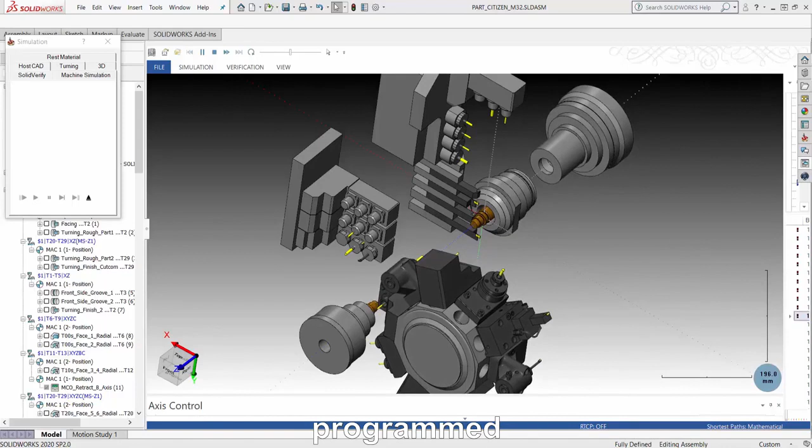Now the complete program can be simulated as it would be cut on the machine with all axes working together. This highlights any potential collisions and will show any superimposition moves programmed, giving confidence the program is correct before being passed to the machine. This can significantly reduce machine downtime.

Once this has been proven successfully, the G-code can be created in a single click, and here we see the result displayed in our SyncMaster software, clearly displaying wait marks and axis patterns. SolidCam is available for all Swiss machines. For more information, please go to solidcam.com.

What we're also going to do now, once Graham's finished, is talk about a few more aspects to our overall range and services that we do.

One we want to talk about, next slide, is the Orbis range. Orbis is a lollipop cutter range. Lots of lollipop users tend to just use it for undercuts or deburring. With the latest software now we're looking at tube milling, so we're looking at manifolds especially.

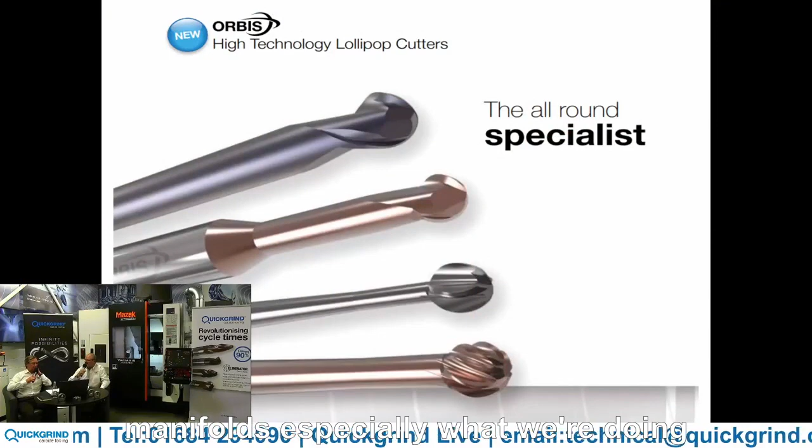What we're doing here is producing different geometries to suit different materials - aluminium, titanium, steel - and if you download this brochure from our website, you'll see there's an option because we'll design it for what you want. Graham's got a customer happily machining PEEK with them and getting tremendous finishes, and that's not an easy material, is it?

Yeah, absolutely. The PEEK material can be quite aggressive, it's an abrasive material, and once again we applied the correct geometry and the correct coating in the TX Plus. Nothing else was really working, but prior to that, the lollipops the customer had been using hadn't had much development in them.

We keep talking about infinite possibilities. We apply a process through every single item we do. You could look in a catalogue and see hundreds of lollipops, all different sizes, but they're all pretty much the one geometry. We make the lollipop to suit the process - we'll do the geometry for aluminium through steels, stainless steels, exotics, carbon fibers, composites, anything.

You have to get the ball right, you have to get the neck behind it correct. When you're using software as complex as SolidCam, they can manipulate the system to almost machine 90 degrees when doing a tube - for instance on a manifold on an Autosport or F1 part - and it almost looks like an impossible machine.

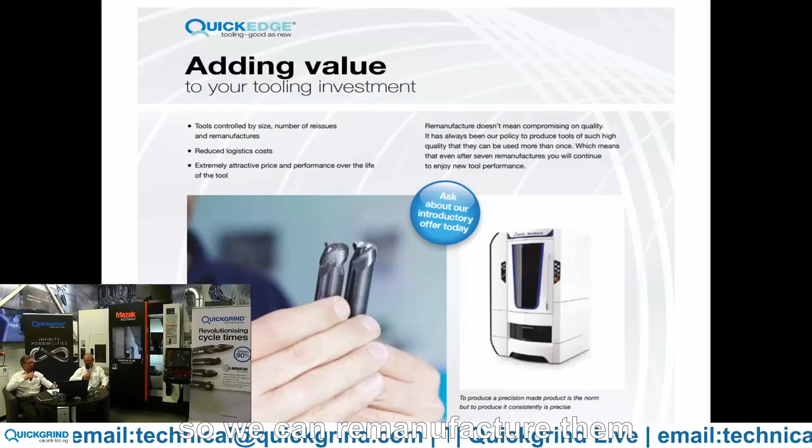And of course, it's not just our own tools - we're happy to take other kinds of tools, especially as a big process we have at the moment with drills. We'll remanufacture anybody's tools - they don't like it, but we do. Drills as well, so we can remanufacture them. There's been some big investment recently on long series drills, 30, 40, 50, so we've put a new P-axis on so we can keep the tool stable.

So that's another thing - we can regrind for you, and of course we can make you new tools, new drills as well. Well, Mike, I think we've got a couple more.

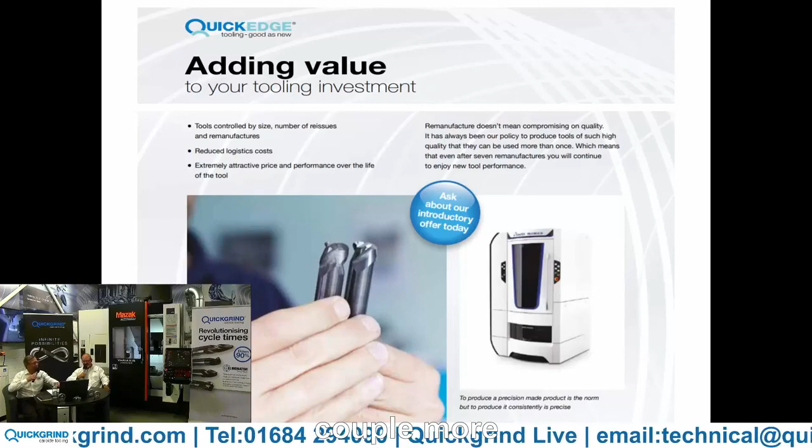Looking at vending now, which is how we drive our stock around the world. We're vending in probably all the countries, virtually every country we deal with. It's very good for your stock control, and it helps with your ISO standardizations too when looking down that route, because it trims everything down and you have a controllable system in place. Everything's controlled from Tewkesbury - we don't have any other facility throughout the world.

Everything that gets vended - if a cutter gets vended in Chile, Brazil or Italy - we see it on our screens. It's a fantastic setup, our own setup, we built the software for it. It's something we're very proud of, and it's also a system we sell throughout the country. So you can buy into the vending side and the remanufacturing side and have it all in one of our vends on site, giving you next minute delivery, not next day delivery.

Yeah, absolutely right. Perfect.